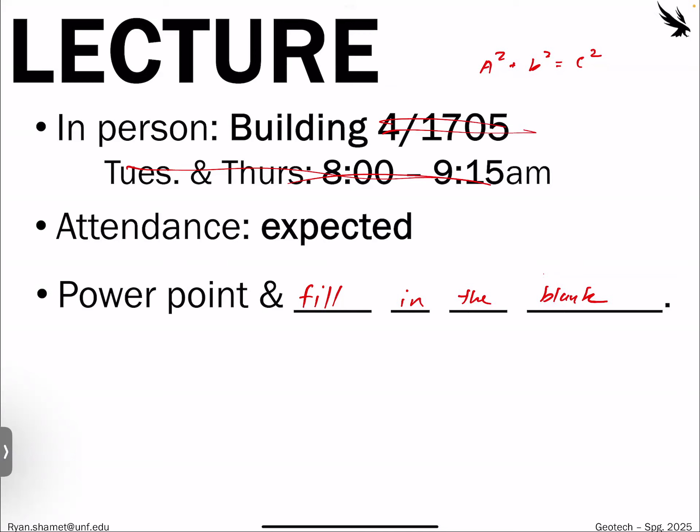Somebody had a question, stop over there. What's up, Clint? So on Canvas, everything - yeah, you guys can see the Canvas page because people have already responded to it, right? So on the Canvas page, one of the first things you should see is lecture notes. If you click on that, it'll pop down and there should be just this one available. Okay, if you want, we can go over the Canvas page after, in a little bit. Speaking of which, you guys are already all familiar, but Canvas is going to be like the home base for this course.

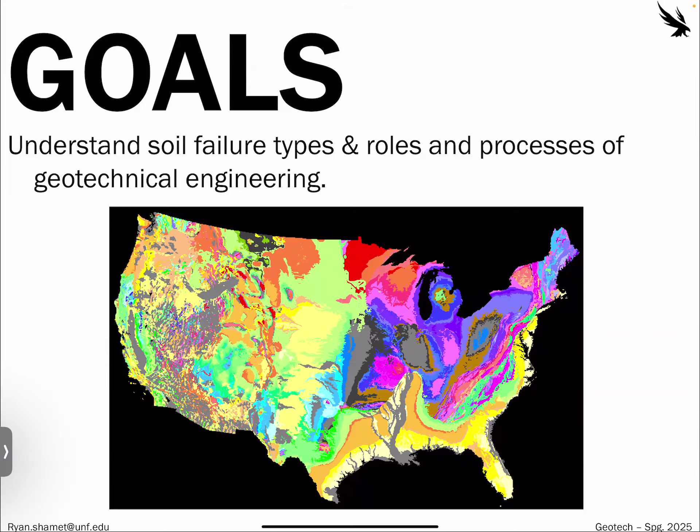Or how soil in the Northeast differs from Minnesota, and all these things. So the first few weeks will be heavy on the conceptual, and then we'll start getting into more of the application in weeks 6 through 10, and then more of the niche Florida issues when we talk about permeability and seepage, problematic soils we have in Florida like sinkholes and organic soils, as well as some in-situ testing, and then some foundations.

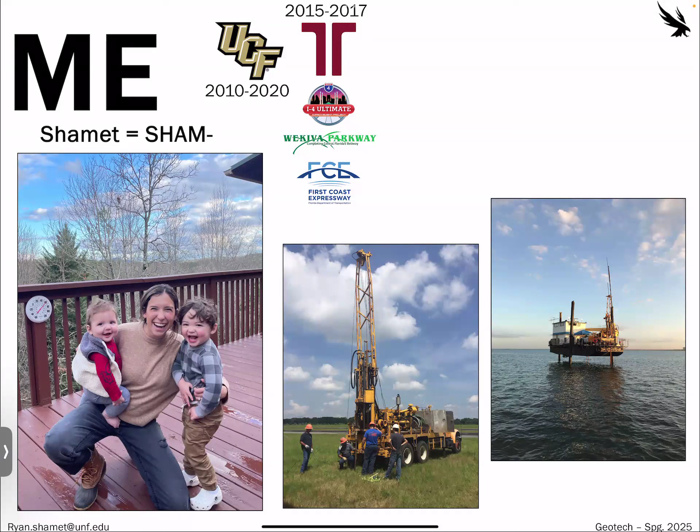Got a chance to live and do a lot of drilling too. We lived out on this barge in the middle of Tampa Bay for 2 weeks. That was right after I got married, so that was not fun. But that was for the new Gandy Bridge that they're now constructing right now. And that was in 2017.

So you can see geotechs are kind of the first people in, and then the construction occurs 3 or 4 years later. So a lot of subsurface exploration, a lot of field work, which is why I personally love this, because you're out in the field collecting soil samples, then you're in the lab doing the analysis, and then you do all the math and stuff. So you see where it came from, and you see the original vision of what you're designing ahead of time.

I also worked at Florida Tech, Go Panthers, if anybody's from Brevard County. Nobody's nodding, nobody's from that area. And then of course, came here at UNF in Jacksonville. Love it up here. Moved in 2020 during the pandemic, which was nice compared to Orlando for pandemic stuff, that's for sure.

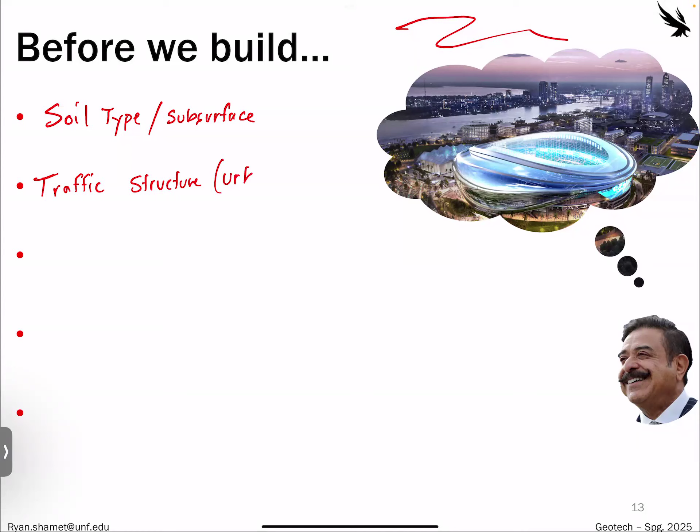Traffic. What about traffic? Urban design, yeah, that's definitely important, and I'm interested in it because it seems like we are constantly redoing or undoing the things we thought were a good idea. Drainage, yeah, that's huge.

Downtown, right? I mean, and everywhere in Florida. What's up, Mikey? Historical significance of the area, whether they buried people there. Yeah, so I'll just keep that as history. That's a good one.

Something that's pretty cool is that most of the time in Florida we're doing greenfield development, but in these urban pockets, Jacksonville and Orlando and some other cities, you've probably done city stuff before. Apparently computers didn't exist until 1990 or 1999 or something, so if you want documentation of what's underground or at that site from a city or municipality standpoint, there's no information. You have to actually go and piece together some things.

Any other ideas? We hit a lot of them here, but yeah, that's a big one. Again, that's like the subsurface, but that's huge. Utility - how is it going to fit together? We're adding this new thing, we already have a grid of stuff going. How can we connect it? How can we go into this?

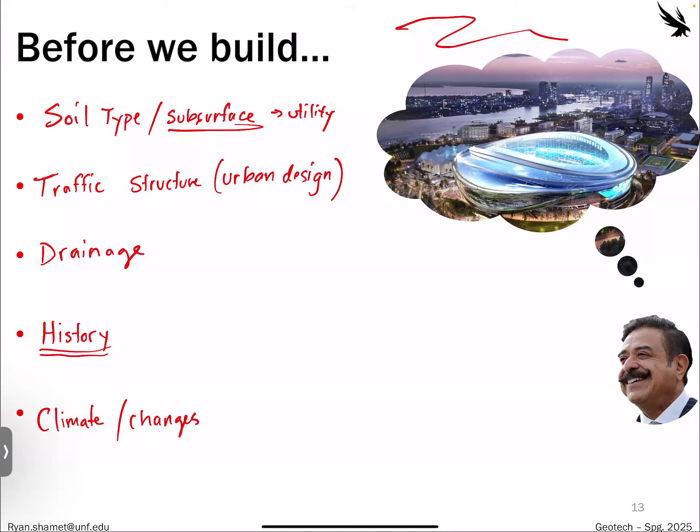How can we think about 20, 30 years into the future? How is this neighborhood, how are the demands of the population going to change here? These are all things, and I hope in this class as well as in classes in the future you think about this holistically. The goal of a civil engineer is to develop infrastructure that betters society. So when talking about transportation, how does that fit with the history of the area and the demands of the area? When talking about geotechnical engineering, how does that work with the drainage, the subsurface investigation, and the utility plans? Thinking holistically will help paint a picture and get a little more out of each class.

When we talk about civil engineers, what we're looking at is design of bridges, roadways, or utilities - all of this is designed or constructed on the Earth's crust. So geotechnical engineering is the science that explains the mechanics of soil and rock and its relationship to the design, construction, and operation of engineering projects. It's involved in that whole cradle to grave process.

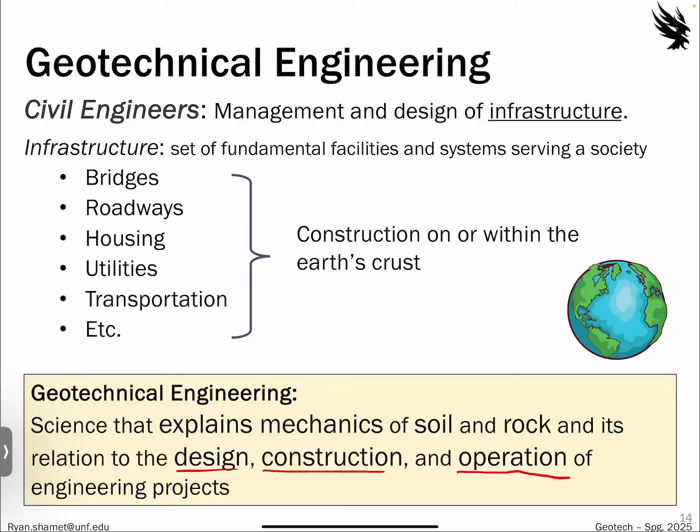You're going to be the first person there drilling holes and getting soil samples, doing subsurface investigation. You're going to be doing the design work, and then also during construction, you're going to be there checking everything.

For geotechnical engineering, we want to make design decisions for the public based on safety and the dollar signs. What you'll see in this class, especially in foundation design, is that we can go all out with a super expensive design, or we can shortchange it and potentially have issues. There's a long-term cycle to think about - the dollars up front versus the dollars potentially each year to repair.

Nothing is more important than in subsurface investigation or foundation design. Because if you think about it, this building - if we need to repair it, redo some columns, or the beams are a little out of whack and need reinforcement, all of that is above ground. So you have to close the building for a semester and tape it off, making it a little harder to get to Starbucks, but at least it's possible and not too expensive.

If we mess up with a foundation or don't consider potential future additions, everything is already underground. It's going to cost so much more to mobilize, to close the building, to excavate, to change the foundation once it's in there. So you have to be thinking a little more forward in advance.

Some of the things geotechnical engineers work on - foundations of structures are a huge one. This column in the corner is transferring all of the structural load. It's sitting on some type of foundation that then transfers the loads from this structure safely through the soil, such that it's not collapsing or settling at an extreme rate.

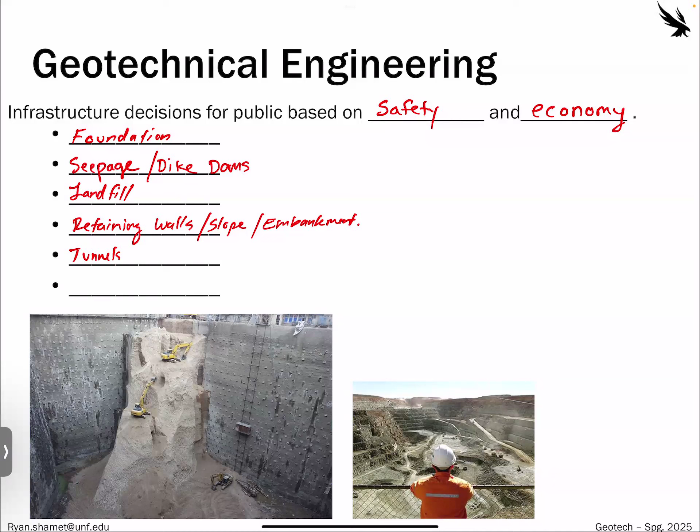Tunnels - not so much in Florida yet, even though we can build full tunnels in Florida, we just don't need to yet, I guess. Tunnels, and excavations - like this picture down here for basements and everything.

Roadway subgrade is another one - making sure that the subbase, the soil, the first thing we're putting on, is going to be strong enough and drain strong enough as well. So a lot of this is looking at load transfer.

So that's one of the main mechanisms we're looking at: is the car, the structure, the dam actually going to stay put, or is it going to sink into the ground or potentially tilt? So load transfer is a big one. But a lot of this does involve water and seepage.

That's kind of the behind the scenes of geotechnical engineering. You're going to be dealing a lot more with hydraulics and with how water can change the strength and composition of our soil. Because it's everywhere, right? Unless you're out west, anytime you dig you're going to hit water eventually. You're going to hit the water table, or it's going to be rainy. It's just something we have to deal with on a day-to-day basis.

Especially when it comes to load transfer, if you remember this word, mechanics, do you guys remember what that word means from strength of materials or something? Something works, yeah, how something works. From an engineering standpoint, what we're doing is setting a mathematical relationship to a physical phenomenon. So we see concrete and it's like, oh, we're bending it until it breaks. That's a physical phenomenon. We're using mathematics to help us define and estimate that. Same thing with steel, same thing with soil.

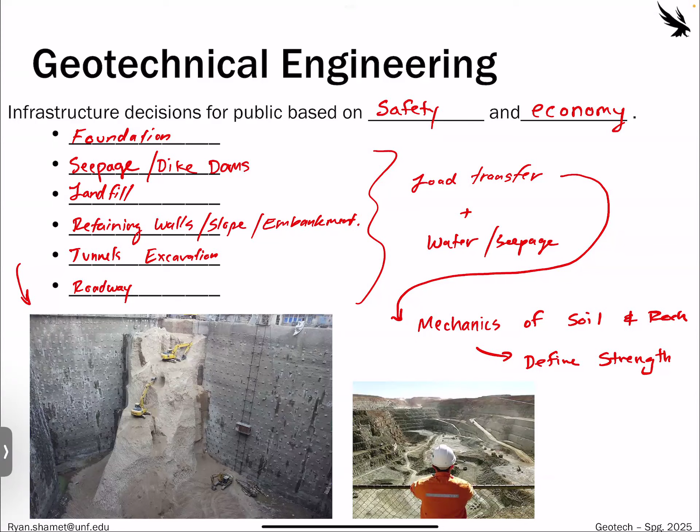All right, role of geotech real quick, I'll go through these really quickly. The big thing we need to remember with geotech is we are dealing with natural material. So there's always going to be variability, always going to be anomalies, always going to be something that we didn't account for.

For the first role of the geotech, it's to investigate the site conditions. We're looking at understanding the subsurface conditions, understanding what type of design parameters might be necessary.

We need to think always negative. How might this fail? Whatever we're building, how might this building fail? How might this tunnel fail? How might this dam fail? And we always need to consider the risk of anomalies.

This means we need to look very strongly into the history of the area. A lot of geotechnical engineering is learning from previous mistakes. Geotechnical engineering has only been a defined branch of engineering since the 50s, so it's still relatively young in the grand scheme of civil engineering. A lot of it is still learning, still unknown. The research avenues are still going, and we're still making new strides in this industry, and a lot of the technology is still being increased.

So the first role is to do that due diligence from the geotech standpoint, understanding the history of the area, how might the soil fail, and then doing a robust subsurface investigation. This is where we can cheap out and just send an intern out there to investigate, or we can get super, super expensive. This is where the consultant comes into it.

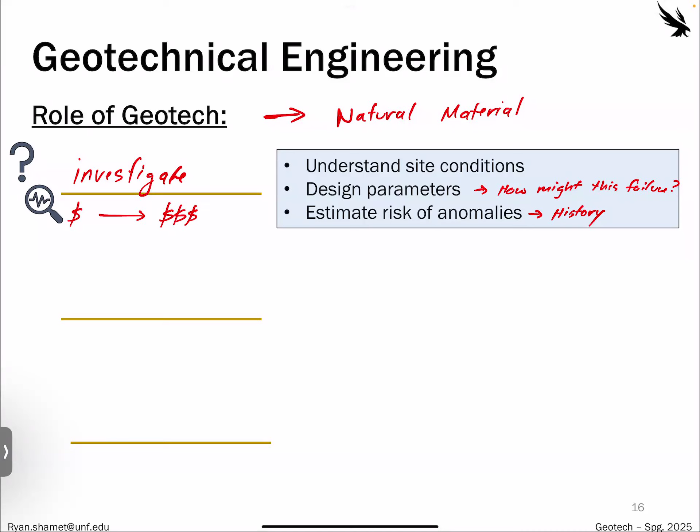You need to work with your client, with the property owner, with the developer to work out a plan and say, what is your risk tolerance? How much cash are you carrying for certain insurance or liability? How much can we actually afford to do a subsurface investigation?

Once we do that, then the geotechnical engineer will do the whole design stage. A lot of this will overlap and work with the structural engineer as well as the owner. If you're designing this building, maybe they're not entirely sure how many floors they want or what the loading on each floor is going to be. So the geotechnical engineer may need to wait for the structural engineer to finish all the calculations so we can know the column loading and column spacing and design our foundation accordingly.

In some cases, if you're designing and the property owner wants to develop a certain piece of property, maybe the geotechnical engineer is the one telling the structural engineer what the limitations are based off of the soil. If it's a swamp, you're like, sorry, structural engineer, we cannot construct a certain loading of a column in this area just because of our physical limitations.

After the design stage, we're involved with the construction aspects, which is honestly, in my opinion, the best part, because then you see the site being developed from nothing, you see the numbers behind it, and you get a chance to work and see the construction occurring.

This is a really important part of geotechnical engineering because we are dealing with natural material. We are doing our design based off of a few holes drilled into the ground, spaced out every 100 feet. A lot of stuff is going to be different between those two points. So changes will happen, and when those happen, you need to be proactive with the owner and the land developer and be out there to make sure the construction crew is being held accountable.

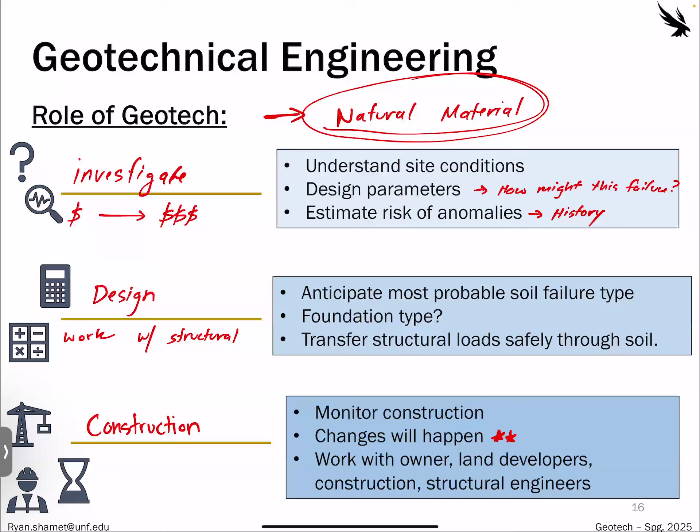When that occurs, the guy working the pile driver will just look over, and it's up to the engineer to make a decision quickly. Do we want to try to redesign that bent, or is it worth trying to splice on another pile even though it just sunk down to the ground? So a lot of changes will happen, things we won't account for, and we'll show a lot of case histories through this class.

This is just a little cartoon of a typical geotechnical engineering project. I want to go through it so you guys get the gist of it here. This is a greenfield development, your ideal, picture-perfect landscape. Wawa wants to come in, or somebody wants to come in and put up a brand new building.

The first thing that happens is the landowner says, hey, I have investors, I got the okay from corporate, we want to build this building in this section, we already got our permits from everybody, we're all good to go. So what we're going to do first is hire a geotechnical engineer to do this initial site investigation.

Now sometimes this could happen even before the landowner buys the property, because maybe they don't know what this area is about, and maybe they want to check and verify that what they plan to construct actually is okay to construct there.

A good example of this was the First Coast Expressway over in Green Cove Springs, there's that golf course that's now a highway. I was working with the drillers with Terracon during that time, before the state owned that golf course. The golf company was like, we're not shutting down the golf course for you guys when you're drilling, we still need to make money.

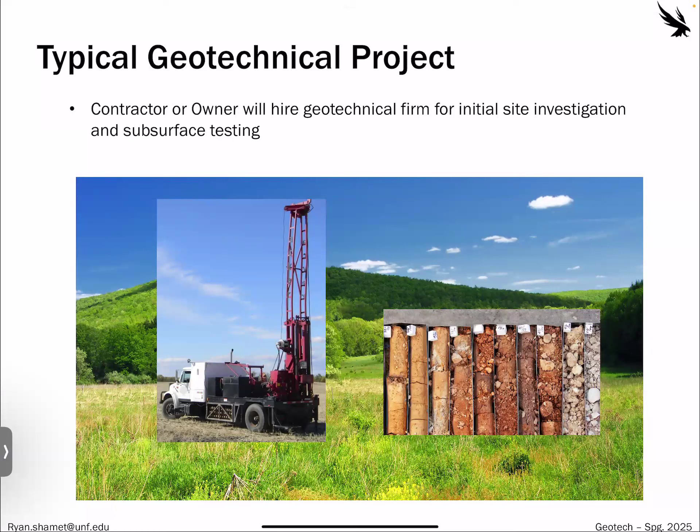So we literally had to drill, bring these trucks out there and set up these bunkers or plates, just in case somebody hit a slice on hole number 4 or whatever, so it wouldn't hit us while we were drilling. A lot of times you're in there while other stuff is going on before even anything is occurring. The goal is to do this strategically, and we'll talk about the different types of testing and drilling. But the goal is to do something called stratifying.

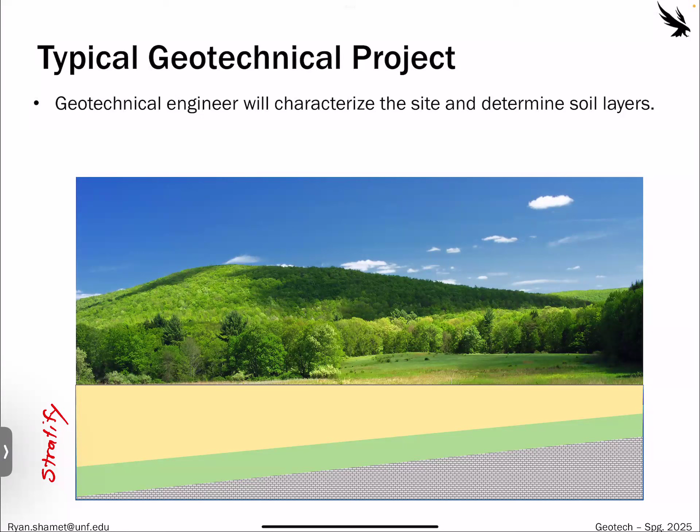I think, I don't remember what, but it's basically assigning subsurface layers and getting an idea of what the subsurface conditions are. And this is where we have to rely on a lot of geologic information. So based off of these single points of drilling, we are going to paint a picture of how the subsurface conditions change or vary throughout our site.

So maybe we hit a layer of sand and then a layer of clay and a layer of rock. This is very common in Florida. Part of that then would be assigning strength parameters.

So all these fun things here, these are all things we're going to learn throughout this semester. These are very similar to compressive strength of concrete, or the yielding stress of steel, like the things that allow us to make the design equations and the mechanics behind it. But it just so happens that for geotech, we have a bunch of different considerations.

So we have friction angle, Young's modulus, bulk density, different compressible things. For rock, you have completely different ones too. So we'll go over all of these things, but you want to stratify, then you want to set the design parameters.

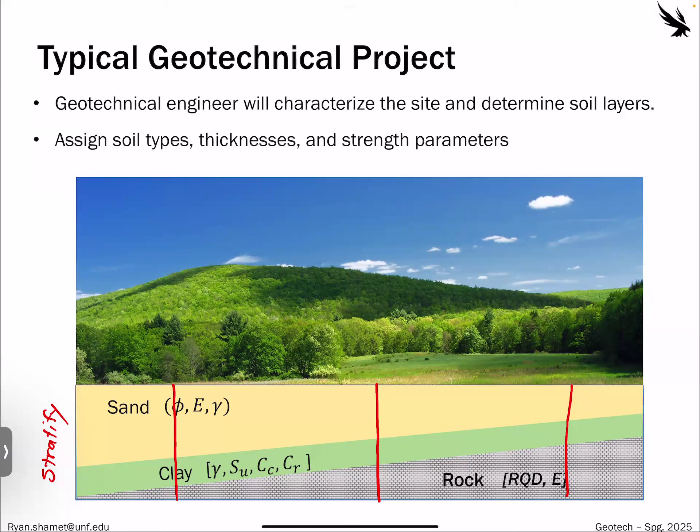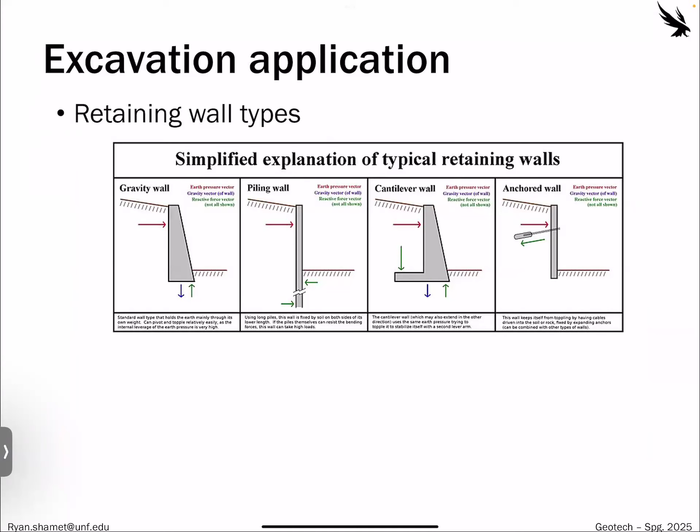And then you need to consider some other potential site things, like maybe we need to excavate to build, or to change a hilly area, or to build an underground parking garage. So what are the best types of retaining walls that we can cover or we can design? We'll go over those too.

Are we doing something like this that's very deep and needs a lot of dewatering, and you have these different structural anchors? We need to make sure the soil isn't collapsing, and we also need to make sure that the structural aspects of these walls are not collapsing.

Maybe to save money, we can do it like here and only do concrete for one section and then do wood for a different section, and save the owner a certain amount of money.

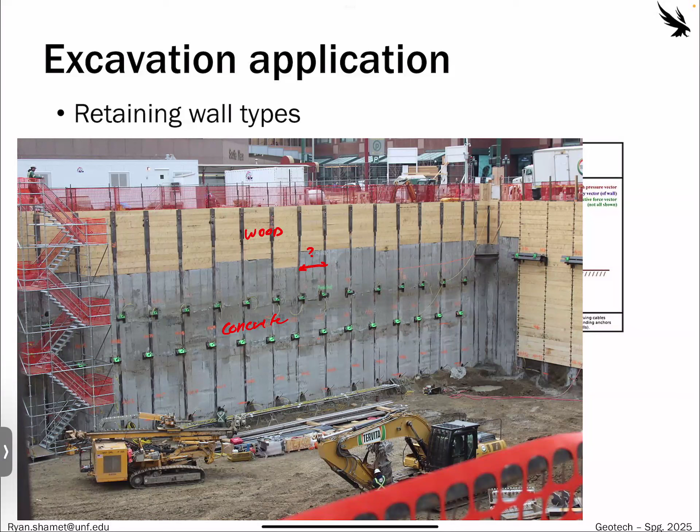What is the spacing of these piles? Maybe we can cut out the amount of pile that we need to drive. Driving one of these piles could be upwards of $30,000. So if we can cut 10 of those out, we just saved the contractor, or the client, a lot of money. So thinking about what type of retaining wall we have, a lot of this we don't have in Florida.

What we do have are these beautiful things. Oh yeah. Does anyone know the name of these things? Yeah, MSE, mechanically stabilized earth walls. They're everywhere. We love it here in Florida.

But these are a type of retaining structure that geotechnical engineers have to design. And it's one of the cheaper things because it's all held up by soil. There's no concrete behind it, there's nothing fancy. We take nice clean sand and we compact it and we put these strips in between it, and it holds it up, and we can hold up highways and all this important stuff.

So maybe this is our design that we're going to go with instead of something like this that's much more expensive. So discerning and deciding what type is going to be best for an excavation.

So the next thing we might need to know is, what are we going to put this foundation on? Are we going to use a shallow foundation, like something like this, that this column is most likely feeding into? It's basically like a boot. You know, we've all lived in Florida.

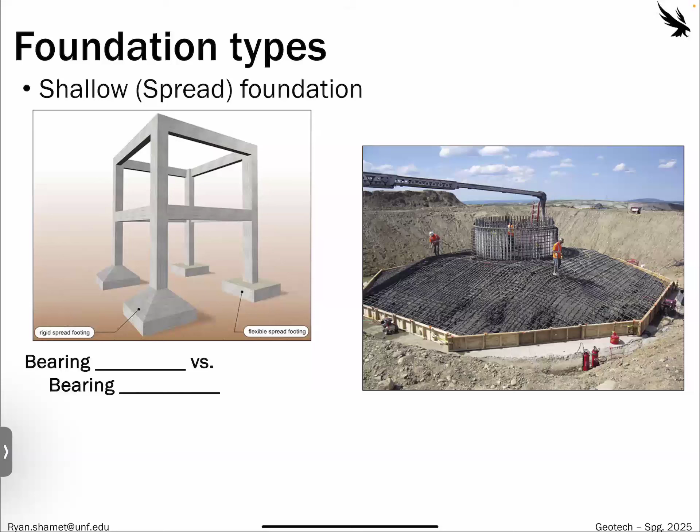We've all probably walked in a swamp before, or know somebody who has. If you're not wearing the right kind of boots or shoes, there's sometimes you're just going to sink straight into it. So the same thing with buildings. If we were to just put this column load and just place the column right on the soil, that column is going to want to punch or sink into the ground. So we need to give it a footprint and distribute the load across a certain area.

So this is called the bearing pressure.

So the pressure that is applied to the soil, we compare against the bearing capacity, or the strength that soil can hold up. It's very easy math when we boil it down: we're looking at the pressure or applied load, and whether it exceeds the capacity of that soil.

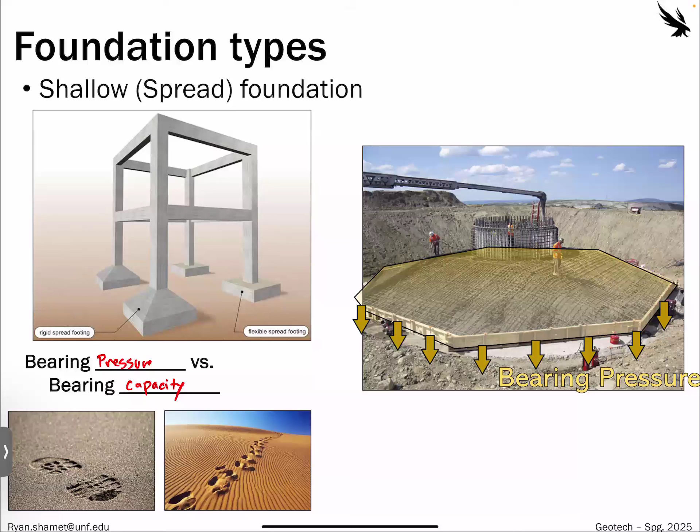We've all seen examples of this in sand at the beach. It all depends on the type of soil first and foremost. You weigh the same, but walking on certain areas, the footprint might change how that soil reacts to you stepping on it.

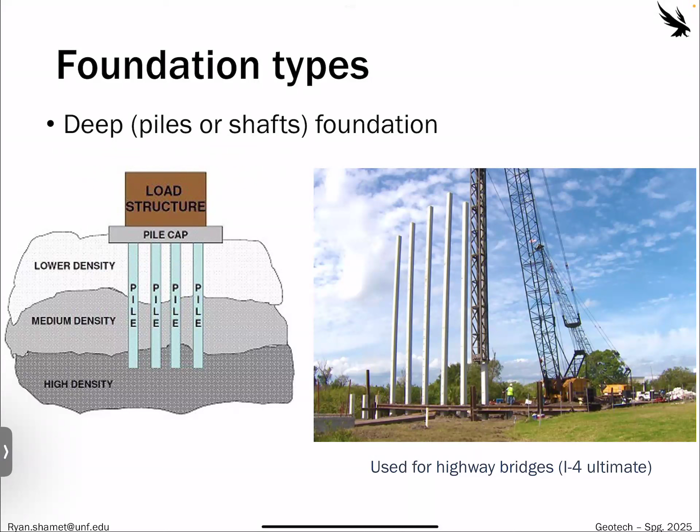So maybe we can't put it on a shallow foundation and we need to put it on a pile. This does basically the same thing, but distributes the load vertically through the soil rather than horizontally. It's used for highways, bridges, and high value structures. It's a lot more expensive and more permanent too. Once these are drilled or driven into the ground, we're most likely not pulling them out for any reason, so we need to ensure our first design is correct, because once they're there, they're there.

So let's say we put this on a pile, and the Wawa Corporation is super stoked and happy. One of the other things we need to consider though is the nearby utilities.

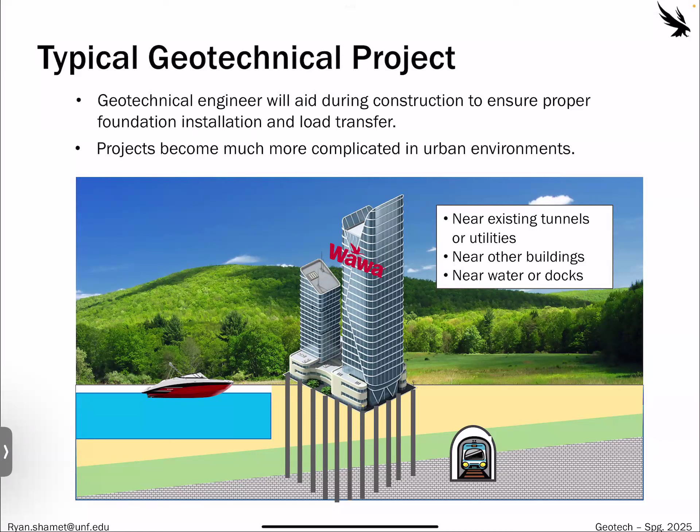A lot of times we are not constructing in a beautiful desktop background green space. We might have a body of water nearby, there might be a metro tunnel nearby. In Florida, there might be some type of loose soil or a cavity underground, a sinkhole.

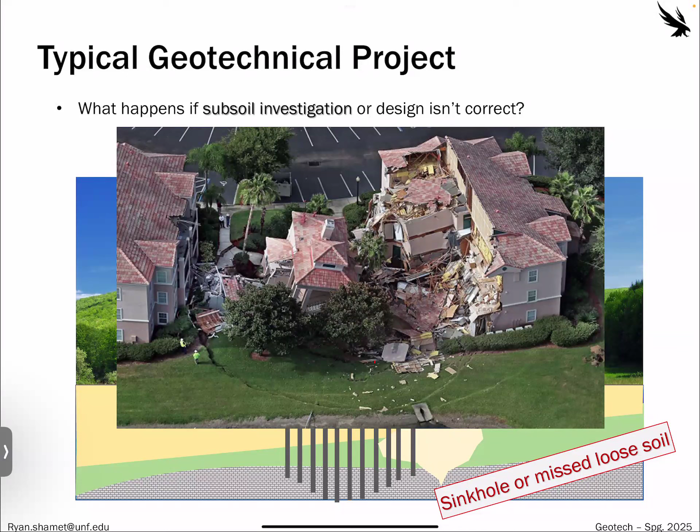Obviously, that has very bad consequences if we are not catching these problematic soil conditions ahead of time and being proactive in repair. Anyone who's lived in Orlando or Florida for more than 5 years has probably seen these in the news. May comes along, a lot of rain will trigger these sinkholes, and then you have big devastating issues like this.

Let's say we designed it a little wrong, maybe we miscalculated the thickness of this clay layer or missed a certain part of it. We could cause tilting, we could cause differential settlement.

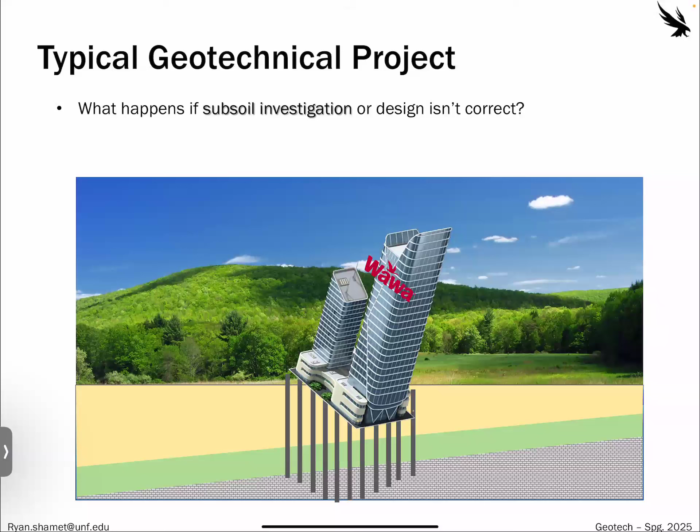I'm sure we're familiar with these issues before. The engineer who designed the Leaning Tower of Pisa is super lucky because he became famous for it. But nowadays, if you design something that tilts, you will not become famous and it will not be a landmark. So we try to avoid this by making sure our subsurface investigation, our geotech work, is good ahead of time.

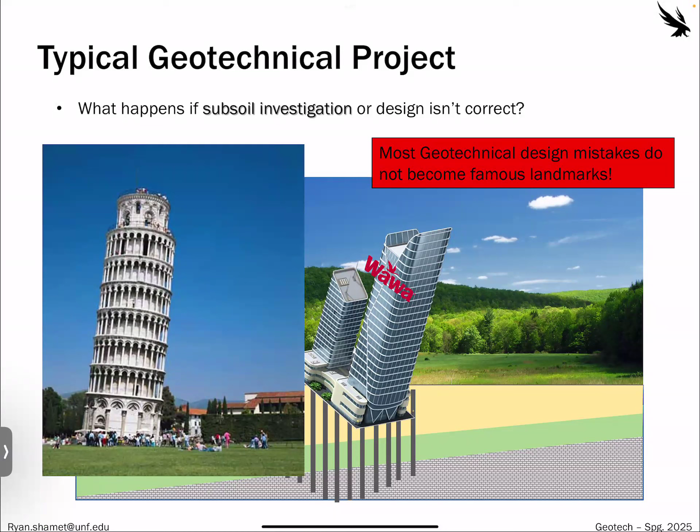So there's a lot of interesting types of design failures. Throughout this class, we'll be sharing a lot of these case histories, because anytime we have something happen in the geotech space where failure occurs, the community needs to learn about it.

In areas of earthquakes, a big one was liquefaction, which is when an earthquake occurs in saturated sand - and all these words don't mean anything right now, but by the end of the semester you'll know it. The soil, whenever the earthquake occurs, behaves like liquid. It's pretty crazy, and when it behaves like a liquid, the strength goes out the window and it can fail in a pretty drastic way.

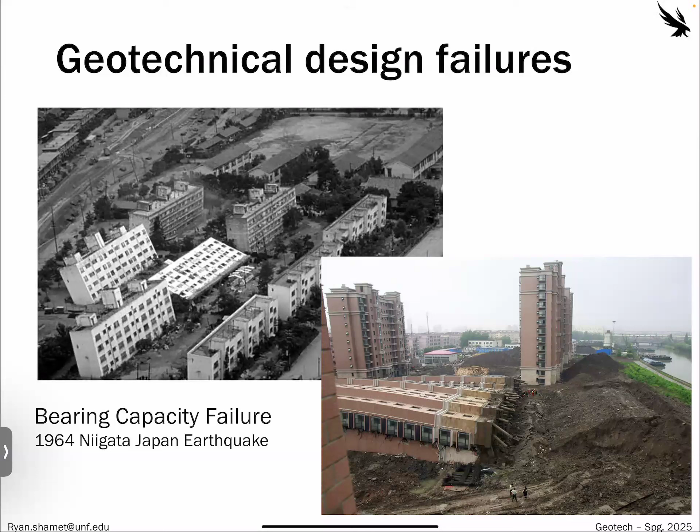A lot of this, we learned in 1964. My dad was born that year, so probably a lot of your parents may have been alive during that time. This is still relatively young knowledge of types of geotechnical failures.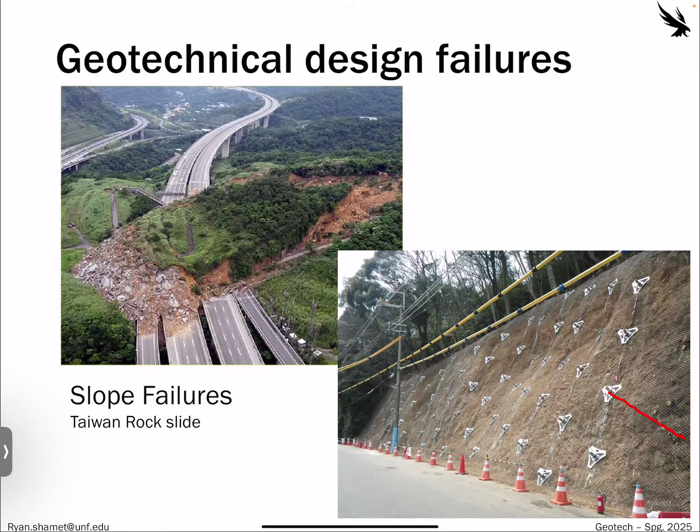So if you've driven up in Georgia or North Carolina, you've probably seen these. This is a way of ensuring we design against this type of failure: rock nails, which are just giant bolts that are grouted into the ground to retain and hold back any potential failure.

This is a good example, actually, one they showed us of understanding the importance of seepage and water flow. This is a construction site in Dubai, a deep excavation. They have a lot of these braces, starting to excavate, almost done, ready to maybe pour the foundation in. It's kind of hard to see, but you may notice one little thing down here: there's a little bit of water peeking through and seeping through.

What you can't see also is they put a pump, installed right here. So they're like, all right, we're good. If we can just control this, yeah, water's coming into our site, but as long as we're able to pump it out accordingly, then we'll be okay.

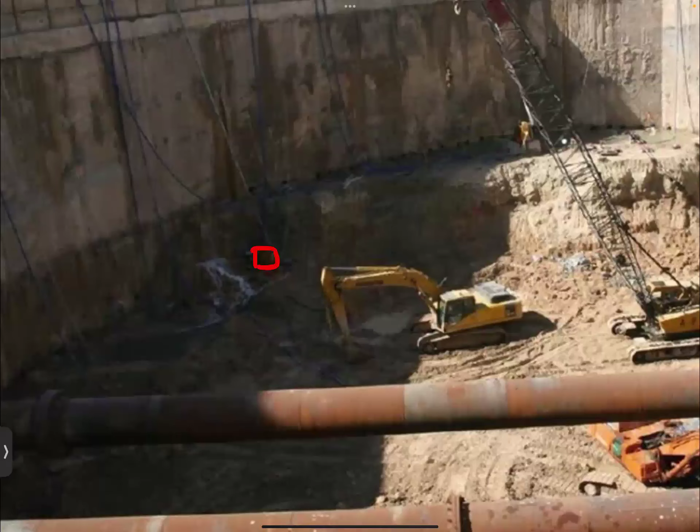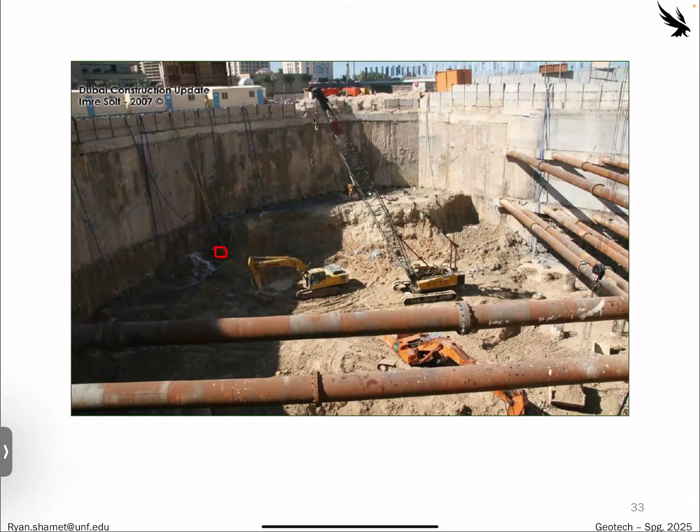But what we know about water is oftentimes moving water produces force, which causes these little sand particles to erode. They erode away, right? And then the more water flows through, the more erosion occurs. The more erosion occurs, the more water flows through, the higher the flow rates. It's a very progressive, exponential case.

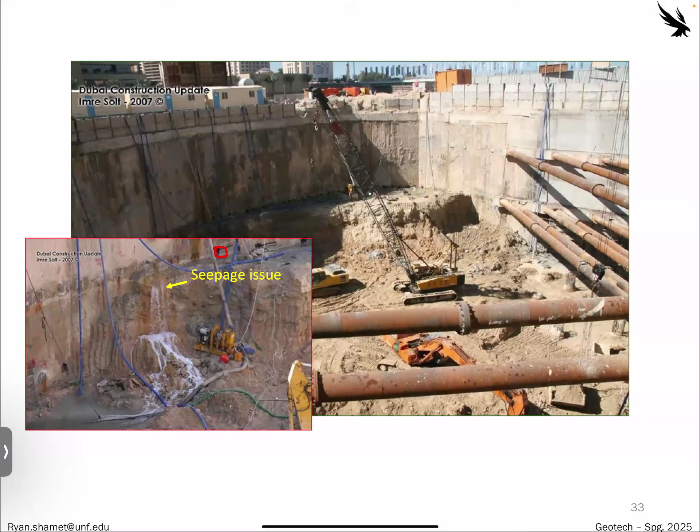So we have this one little seepage issue here that could have just been a subsurface investigation issue, a construction issue, or maybe the engineer just miscalculated the seepage and wasn't able to design this pump accordingly. But you can see what that small little issue can become: a beautiful lake now that you have to pump out and redesign everything.

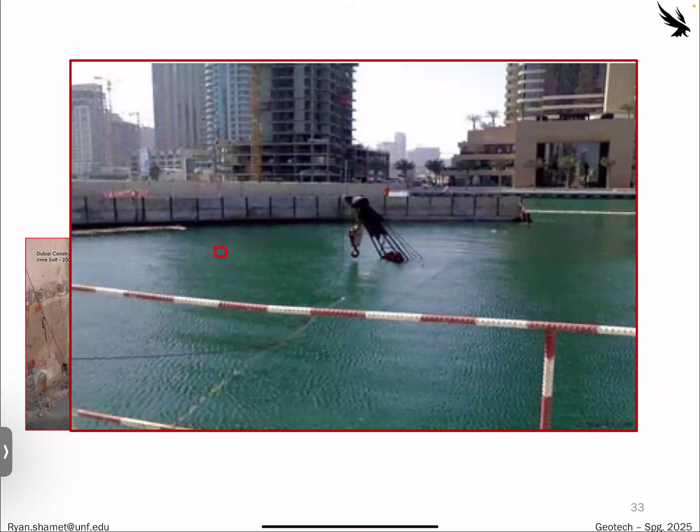So these small little mistakes, these small little things you may be glossing over when it comes to geotechnical engineering and foundation design, these all scale up to massive consequences. And that's why we need to consider this. Remembering that yes, 90% of your project could be completed and perfect, but if there's 1% or just 10% of it that fails, then oftentimes the whole thing does.

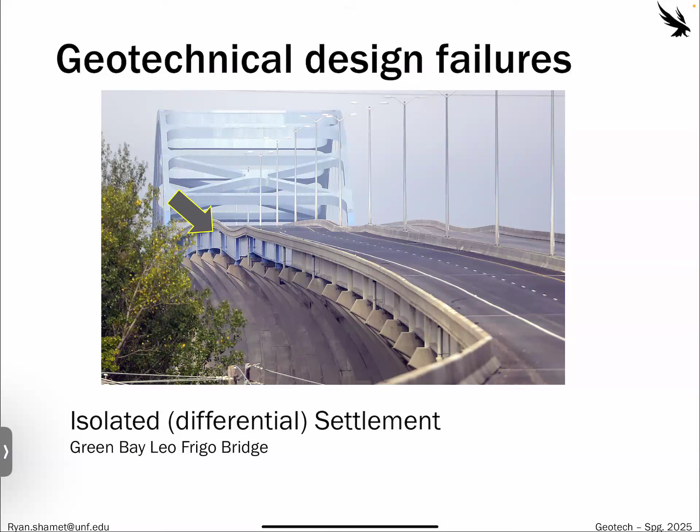So this is a good case history up in Green Bay where they designed every single pile, every single bridge bent foundation perfectly. They miss one that potentially settles even just a few inches, and then of course you can't keep the bridge open. You have to keep everything closed, fix this especially once it's all complete. It can be very expensive to try to mitigate and fix.

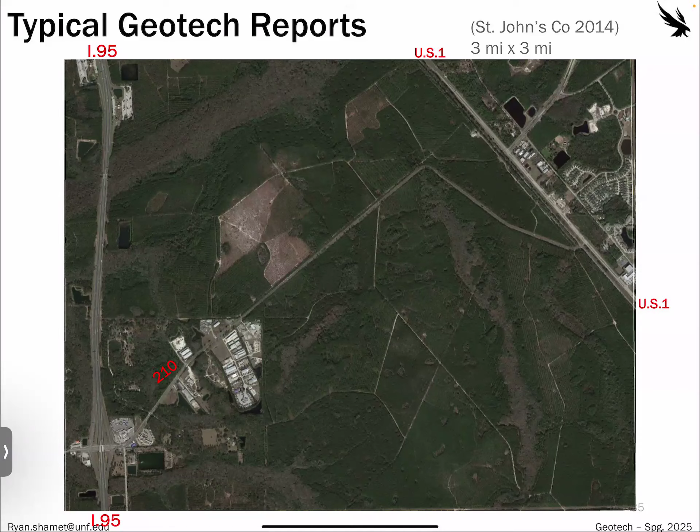So what we're going to be focusing on a lot here in Florida, especially in St. John's and here in Duval, is the development. We have a very unique opportunity to look at case histories of green space development as well as urban development. I'll try my best, and part of the last project is going to be looking at a specific case history here in Jacksonville that maybe you drive by every day and doing a geotech report on it. You guys are familiar with this area, St. Johns County, I-95, 2014, there's nothing. It was just the Davises owning a bunch of land, and now, boom, it just develops within 5-10 years.

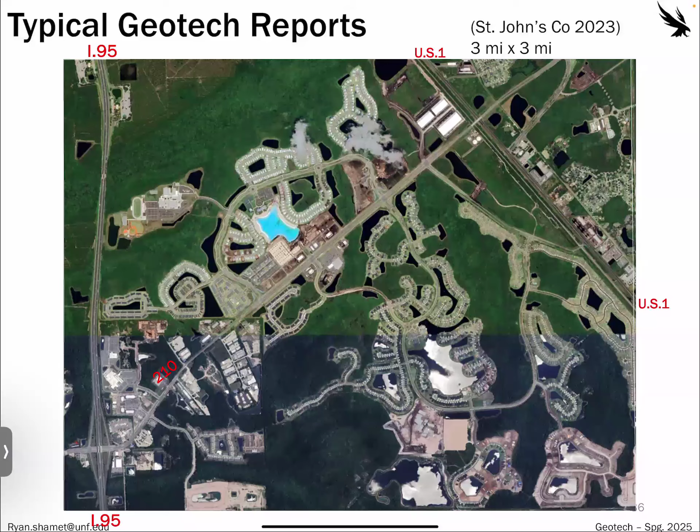So just to give you a little hint into the geotech's work here, let's look at this one little section, this one little development down here. There are multiple geotechnical reports just for this one little development section. So with any project, you're going to need a geotech report. This is from ECS, which is a really good company. They did the pond design, and they also do the foundation design. I'll share these reports so you can go through and get a sense of what that end goal for a geotech consulting is.

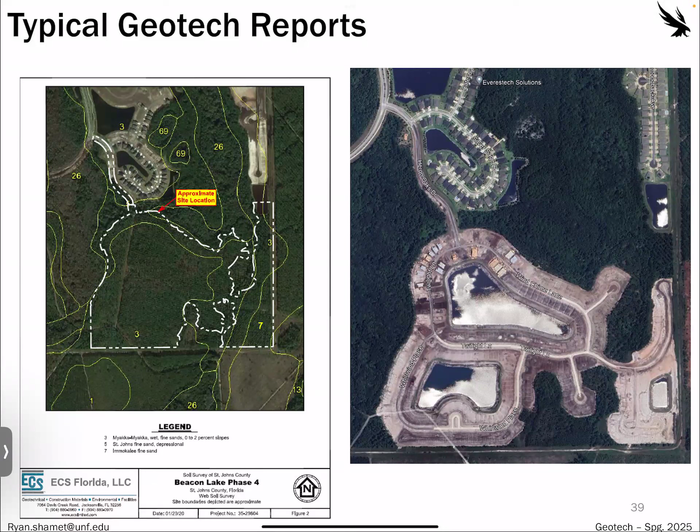So for example, here you need to design, you'd work with the land development - I don't know who it actually was, it could have been ETM because they do it all the time together - but you'd establish, okay, the developer wants to put this pond in this location. So then the geotech would be like, all right, sweet, let's go find out if we can actually put a pond there and where are the wetlands, and we'll go out and do drainage and boring. So these are the boring locations where they decided we're going to drill here, here, here, here. We're actually going to test the soil and see if it's applicable to put a pond there, see if the soil will even absorb the pond or not. So those are all the different types of borings.

Why do you think they did this many here in this pond? They found good soil. Found good soil, yeah.

But the big picture is, there's no answer. I don't know why they did that exactly - the engineer just decided let's do one here, let's do one here. There's no standard saying a pond of this size must have X number of borings. It's all up to the engineer working with the owner and client to discern what's best and how much money they want to spend.

These plans are given to the geotech company before they go out there. They already have the residential layout, but this is like a draft, and then the geotech goes out based off of this and says yes, we can put the pond here. Maybe this boring is all clay and non-absorbent, so they might need to change the pond design and add to this - it's an iterative process.

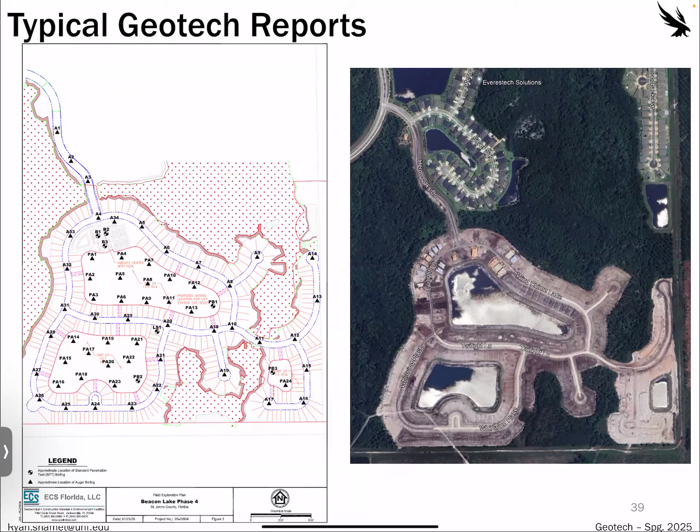So all that to say, with the typical geotech report, even just for a small residential thing, there's a lot of work that goes on behind the scenes. We'll share a lot more about this, so don't worry about the details right now. But one of the things they would provide is a boring profile.

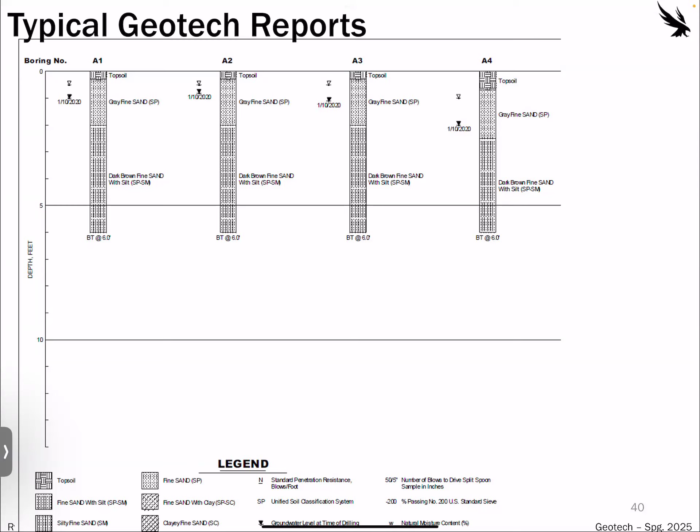And this is how it's always shown, and this will be part of your first lab. We always show it with depth on the y-axis and distance on the x-axis, and the goal is to see how the soil changes with depth, as well as this right here. Does anyone know what that little logo means? It's the boring was tough. What about the little triangle? Water - yeah, that's the groundwater table.

So that's one of the major roles of a geotech too, is to estimate - or measure - where the groundwater table is. And then also, anyone know what that one is? It's our surface of the water. No, kind of. Yeah, seasonal high water table. Anyone want to know how that's calculated, or anybody know how it's calculated?

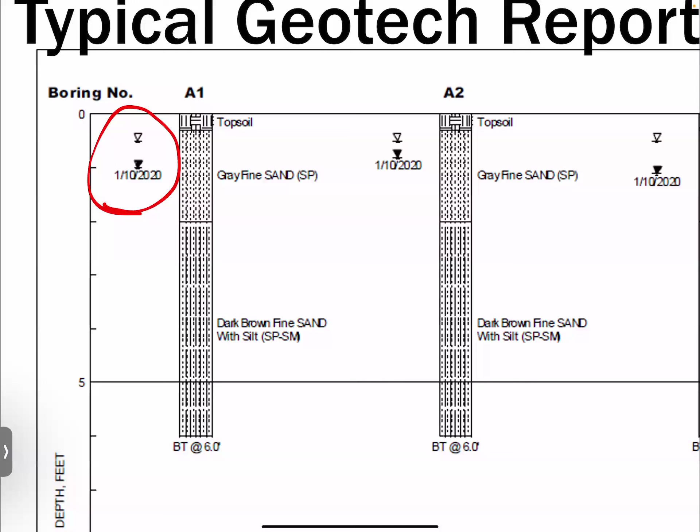Those are all correct answers because it differs from firm to firm, it differs from engineer. There's no standard - it's all judgment related. They would look and see, alright, this was measured in January 10th, it hasn't rained, it's not a rainy season, so it's most likely not the high groundwater table. They would know what type of soil it is and just kind of estimate based off of terrain - alright, we're going to bump it up 5 feet or 3 feet or something. But that seasonal high water table is really important, because that's what they need to design the pond stages off of and everything. So there's a lot of judgment in there.

And that's why every geotechnical engineering firm has a bunch of white-haired dudes who have been in the business for a long time. And it's very important to learn from those people.

That's the cost of if they wanted to pump the water out instead. Well, if you pump the water out, you'd have to have a pump going 24/7, because it's the groundwater table, so it's just going to come right back in naturally. So we're dealing with something that we can't necessarily change, you just work around it. Maybe you can't develop in this area, maybe you need to add more fill to raise the elevation, or sometimes you just need to redesign someplace else.

You guys talking about? Yeah, that's good. Okay.

Yeah, it's the voodoo of geotech.

Alright, almost done here guys. This is just some components of the reports. I'll share with you guys if you want to go through and look through them a little bit more. But a lot of it is in that subsurface investigation and describing the things.

And remember, as geotechs you are giving your expertise in a consulting role - you're sending this to the owner, you're sending it to the developer. So the whole part of it is taking your knowledge and professional background and making it understandable and digestible for somebody who doesn't necessarily have that background. That's the hardest thing for an engineer to do - remembering that you're doing these 4 years doing engineering speak, working only with engineers, and then you get to the workforce and you have to submit a report to somebody who has zero background in engineering.

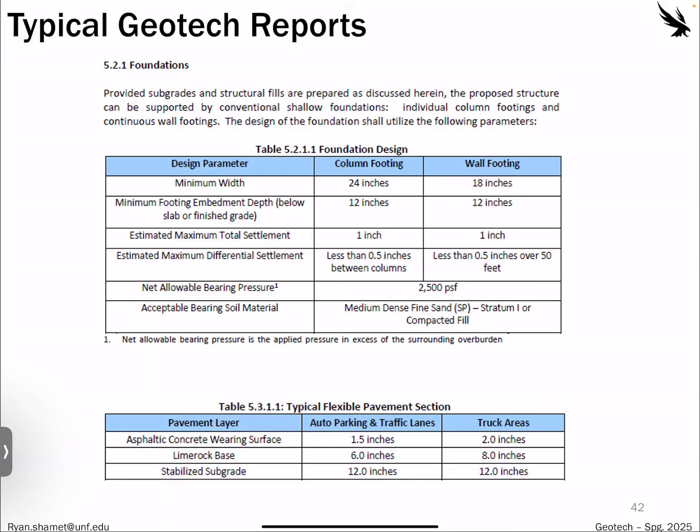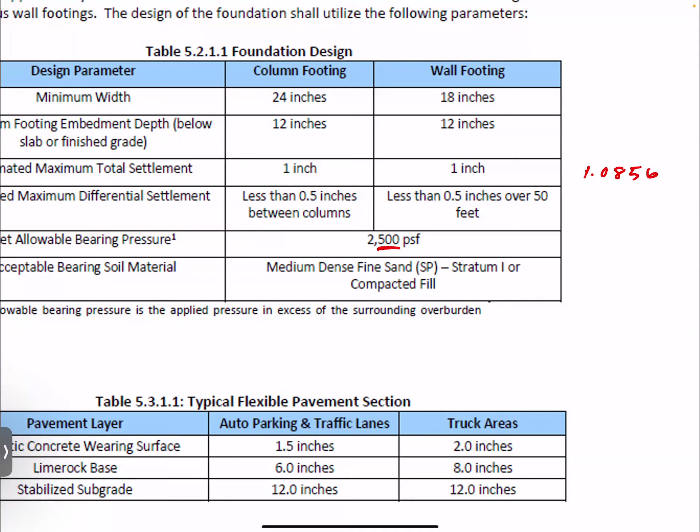You need to learn how to communicate effectively—tell clients only the important information, don't complicate things or scare them away with numbers. It's kind of weird: in school you're taught to be precise with sig figs and all that, but that goes out the window when you start working in geotech. You'll round to the nearest 500 value. Say a settlement calculated in class comes out to 1.0856 inches—you never want to be too precise in geotech, you just say 1 inch. So you're rounding and using significant figures differently than in school.

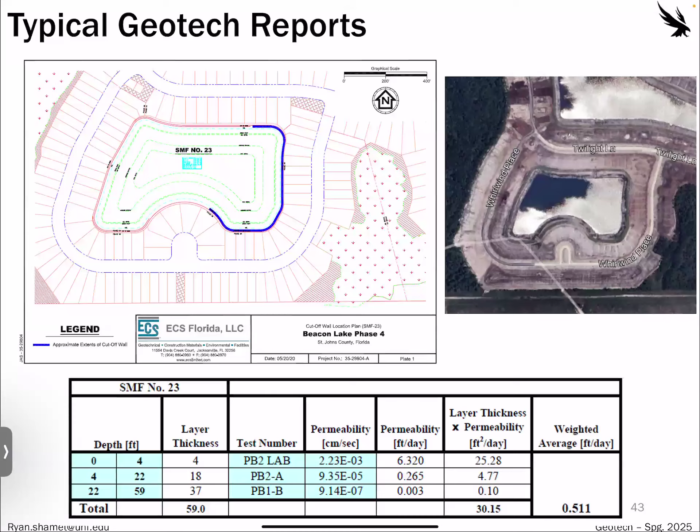These are just other pictures showing some other geotechnical engineering designs. For this one, they had to design a cutoff wall based off the elevation, so that was part of the design too. They had to run different tests for permeability to make sure the pond would drain effectively during high storm events—that's part of the aspect as well.

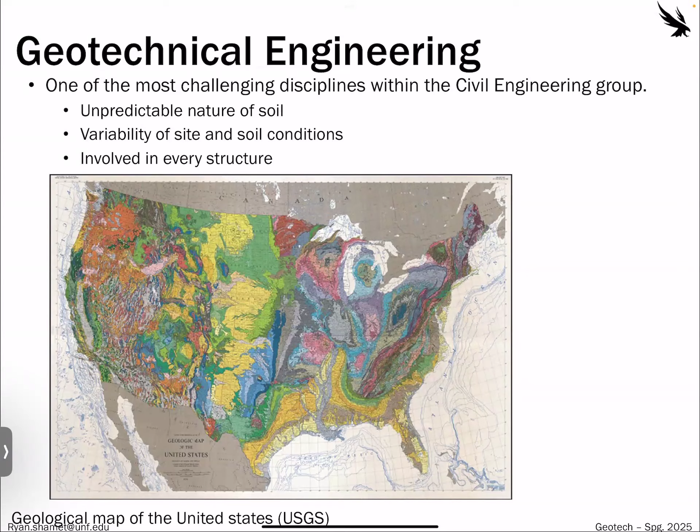This is that map again from the very beginning. Think of this moving forward: in geotechnical engineering, the variability is insane. A lot of the first part of the class, the baseline, is understanding the site conditions and the potential issues at each site. The benefit is it never gets boring; the downside is there's never a real answer. You always have to paint a picture for your client, and there's always a lot of risk associated with that. The whole art of geotechnical engineering is managing and mitigating that risk.

Since we have 5 minutes left, I want to share this example. There are extreme types of geotechnical issues based strictly on geologic conditions that are very unique to certain places. Here in Florida we have a very specific type of sinkhole that only occurs because of our aquifer and sand. On a more catastrophic, larger scale, up in Norway and Canada—where people don't live as densely—there's a really interesting geologic formation called quick clay, or sensitive clay.

Long story short on how it forms: the clay used to have salt water in its pores during the glacier periods, but when the glaciers melted, fresh water infiltrated into the pore space of the clay. That change in salinity changes the composition of the soil such that if you load it at all, it behaves like a liquid automatically—going from very strong and competent to having zero strength very quickly.

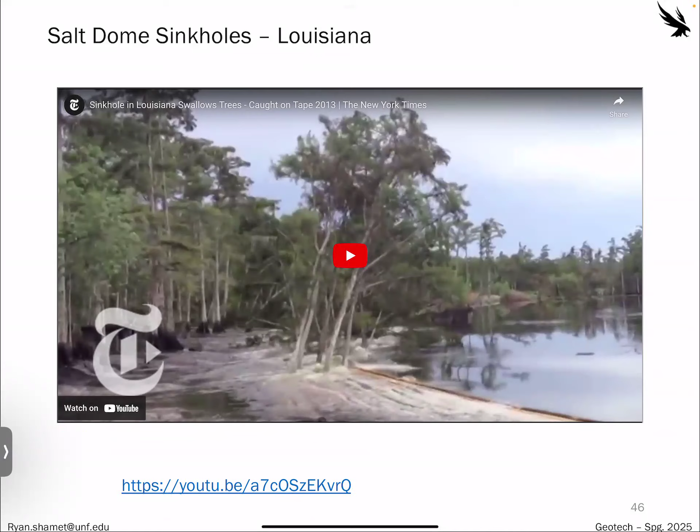Another very site-specific issue, a bit closer to home, involves the salt domes in Louisiana—sinkholes on a crazy large scale. There's a mine in Louisiana in the bayou area with big plumes of salt about 600 to 1,000 feet underground, which is where a lot of our Morton salt comes from. They put giant tubes in the ground and pump the salt up to the surface. What happened with this one was that while drilling, they hit a cavity underground in the salt mine, which opened up the bottom of a lake to a cavity 1,000 feet below ground.

So you have these 100-foot tall trees just getting sucked into this cavity as the lake drains into the subsurface cavity. This might not necessarily be a geotechnical engineer's fault, this is more so on the mining side of things. But you can be very confident if you're a geotechnical engineer designing in this area, you need to know where all these salt domes are, so when you're drilling, you don't accidentally pop one of those cavities or mines underneath it and cause this catastrophic failure and progressing sinkhole.

So this is called Bayou Corne. If you just Google it, you can see there's a bunch of reports and aerial imaging. They basically had to evacuate a whole town because this sinkhole was just growing and growing as the mine, 1,000 feet below ground, is just filling in with all the dirt and soil and water.

It's pretty catastrophic. The other thing I'm going to switch to, I mentioned this liquefaction. This is very common in places like New Zealand, Australia, and areas in Japan, coastal cities that experience earthquakes. If we had earthquakes here in Florida, this would be a huge issue. What this does is it causes the sand and the competent layer, like the roadway, everything we walk on, to behave like a liquid.

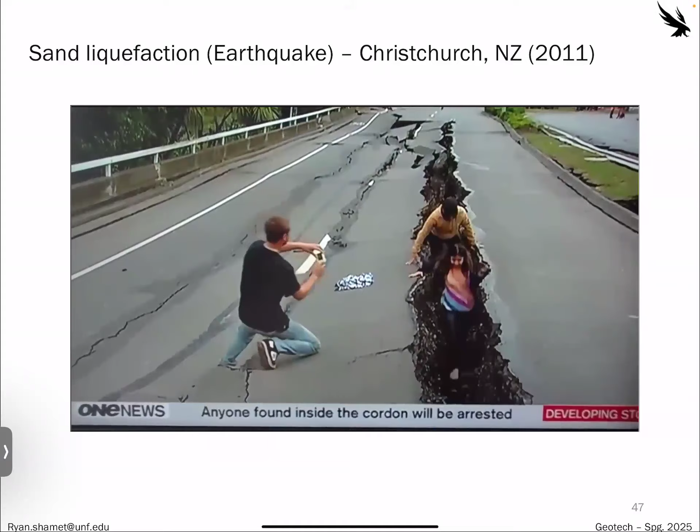And then whenever the shaking stops, it just traps everything back the way it is. This is the best video ever because it shows how badass New Zealanders are, like, 'I still gotta take my kid to daycare.' I'm walking and just like, oh, we're just gonna pull in here. But obviously, for roadways, for infrastructure...

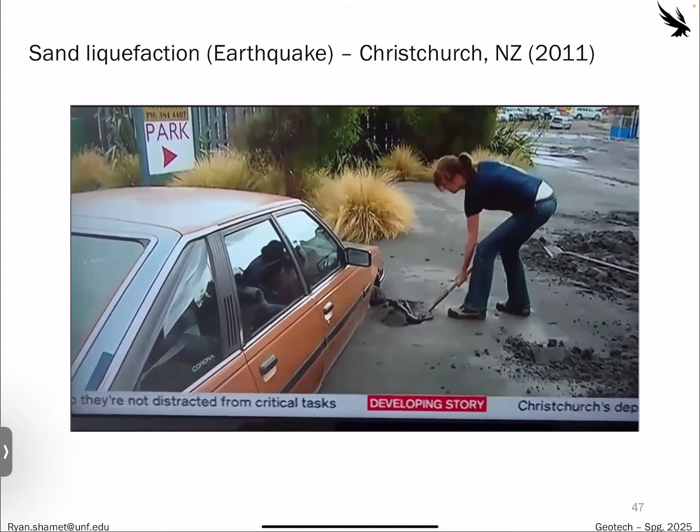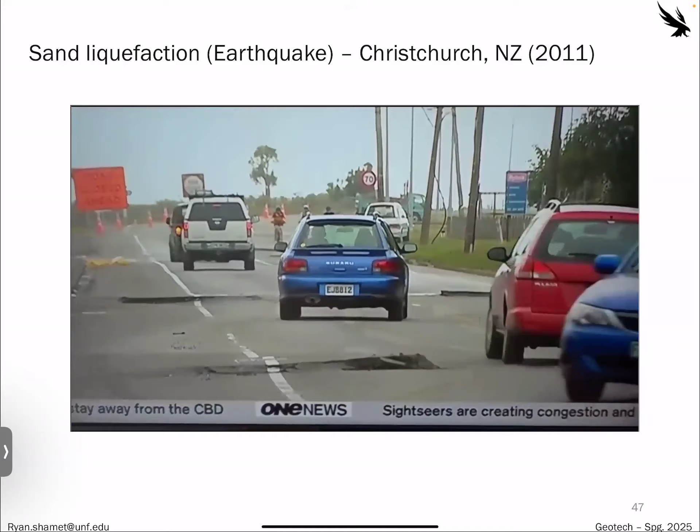So you have your everyday geotechnical engineer, the person who designs the foundations, stormwater ponds, retaining walls, everything. But you also have these specialty sectors based off of the region. Here we have a lot of drainage, a lot of compressible soils, a lot of problematic soils with sinkholes.

But if this interests you, say you're from Brisbane or New Zealand, you have to deal with floods and different design considerations against that. We're not sure exactly where we're going to go from here, but different types of rock and site-specific issues are what I think make geotech interesting, because you have to worry about what the demands are of that specific area.

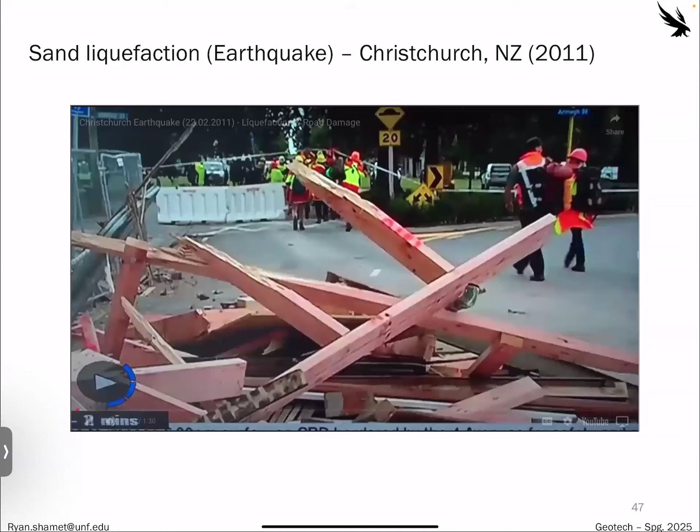Okay, so long story short, geotech—by the end of it, I'm going to be trying to convince you all to become geotechs. It's always going to be a wide variety of work. It's a relatively young science, as I'd mentioned—the 1950s is when it became a legitimate engineering discipline. One of the best quotes is, 'There's no glory in foundations because most of the work is buried.' That's kind of the cool part about it—you spend all your time and energy designing something that the public doesn't even know is there. It's kind of behind the scenes, and you really only get your job known when something goes bad, because then people see.

So I'm excited to teach you guys this. It's a passion of mine, and it's really cool. Even if you're not getting into geotech, it's something you're going to be working with—you're going to be building something that a geotech needs to design. So they're going to play a role in it in some way or another.